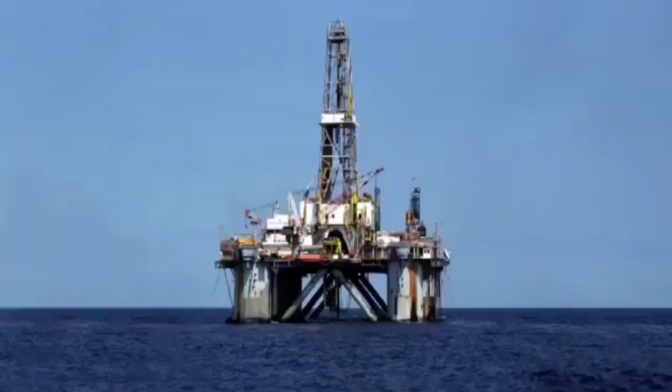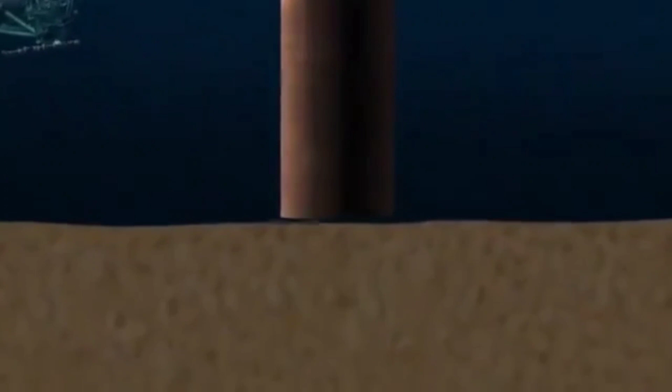Offshore drilling rigs have all the functions of onshore rigs, but also need to stay on station in a variety of sea states and allow for secure connections between the surface and the sea floor. To start an offshore well, a thick-walled, large-diameter hollow tube called a conductor is embedded in the sea floor, with the aid of a bit that jets away the sediment with high-pressure seawater.

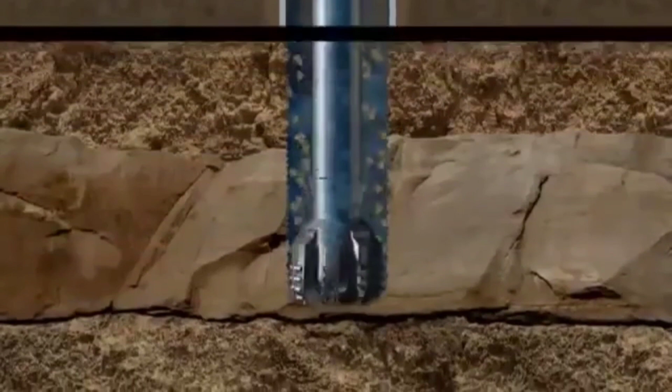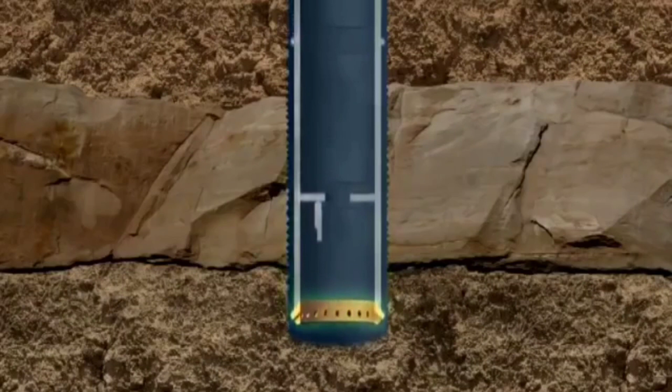When the conductor has penetrated about 250 feet, the jet bit is retrieved and a drill bit introduced. The cuttings are just washed to the top of the well by seawater pumped through the bit. A second run of conductor is now lowered into the hole. At the bottom of the conductor is a guide shoe that stops the conductor snagging on the wellbore. Above the shoe is a flap valve called a float collar.

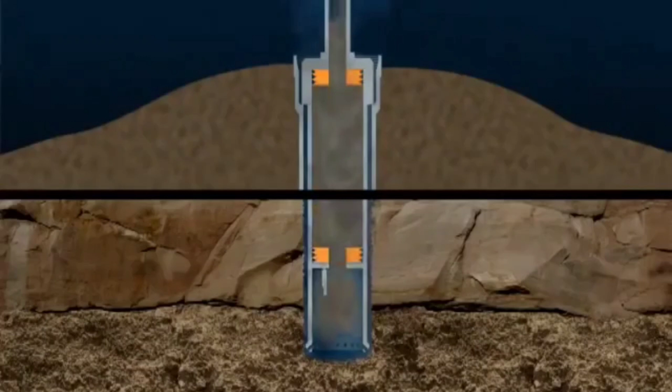A cementing tool is connected to the top of the conductor. A plug that pushes the seawater out is driven downwards by high-pressure cement that fills the conductor. On reaching the float collar, this plug is ruptured, and cement flows out of the bottom of the conductor and up the annular space between the wellbore and the conductor.

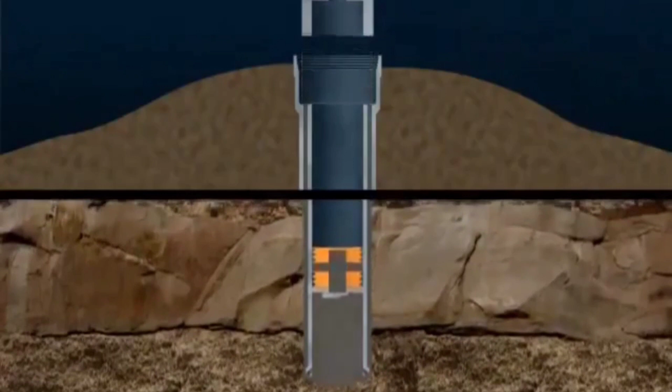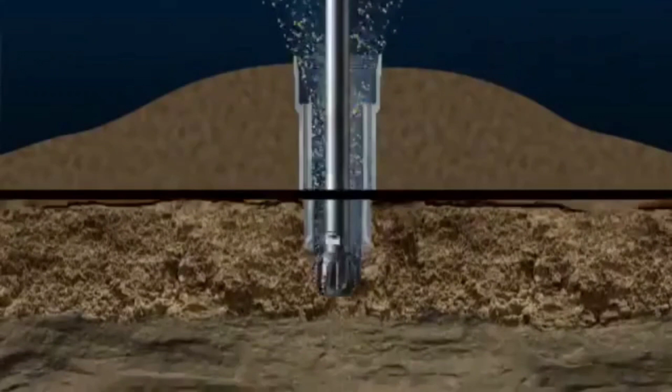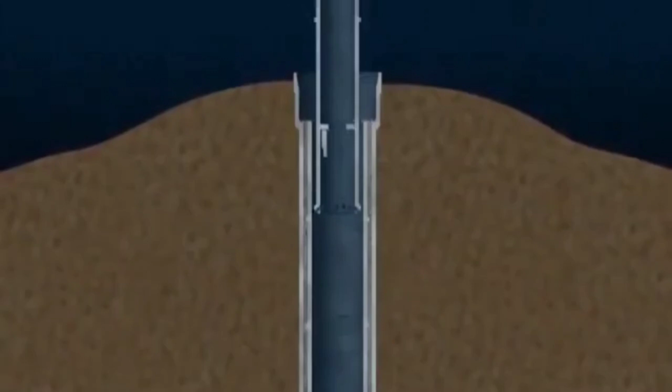The cement plug tool is removed, and when the cement has set, drilling continues with a smaller diameter bit, penetrating the cement plugs and float collar and into fresh rock. After a suitable depth has been drilled, the drill string is removed. Then steel tubing, known as casing, is lowered into the hole and cemented in place. This first casing run has an attached wellhead.

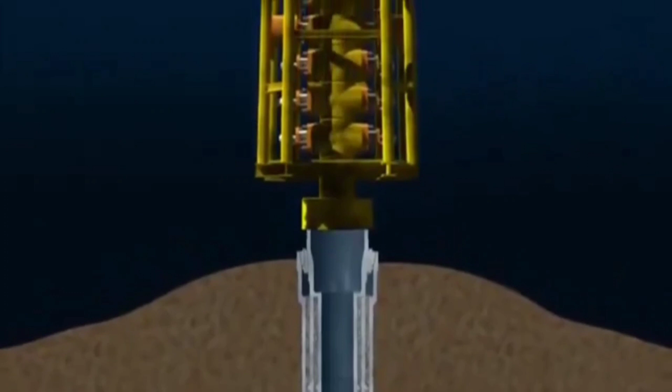A blowout preventer, BOP, a robust set of valves that can shut in the well even if the drill string is down the hole, is then lowered and locked onto the wellhead. The BOP is connected to the sea surface by large diameter tubing known as a riser, which allows drilling fluids to be returned to the surface. From this point onwards, the drilling procedures are similar to those used to drill an onshore well.

With the riser in place, seawater is replaced by a special fluid known as drilling mud that is pumped down the string and exits through ports in the bit. The mud not only cools the bit, but also clears the cuttings from the hole. The cuttings are captured at surface and examined by geologists to characterize the rock types that are being penetrated.

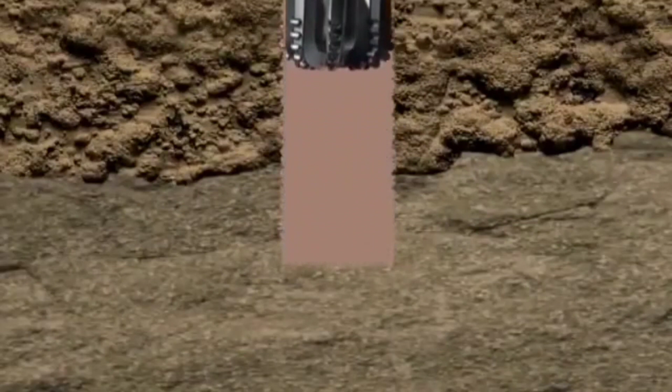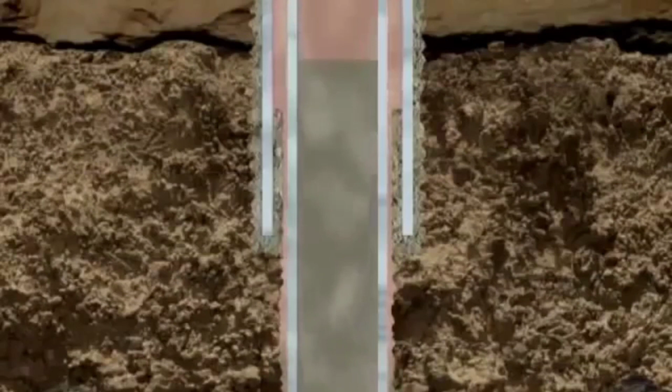As drilling continues, sets of decreasing diameter bits and casing runs are used as the well penetrates deeper into the rock. Each run of casing is cemented in place to provide integrity, a sealed system from top to bottom. The density of the mud is controlled by the mud engineer, adding dense minerals when needed. The aim is to produce a column of dense mud which exerts sufficient pressure in the well to counteract pressure from fluids encountered in the rock.

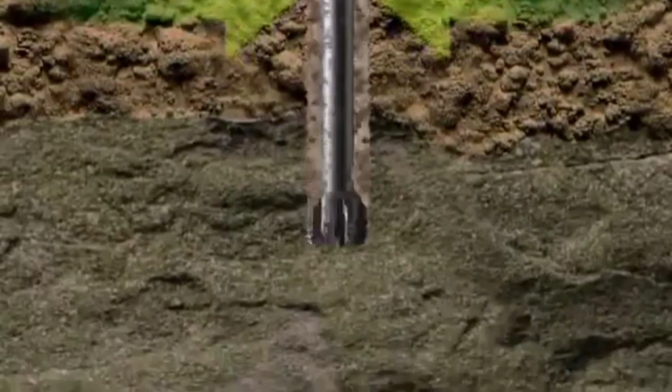This combination of the dense mud column, contained in properly cemented casing, aims to control pressures in the well. The BOP provides a further level of security. When the well penetrates a potential reservoir rock, the oil or gas may be detected by analyzing the drilling cuttings for traces of gas and/or oil. At this stage, it is essential to gather as much information as possible about the reservoir. Two methods provide most of the information.

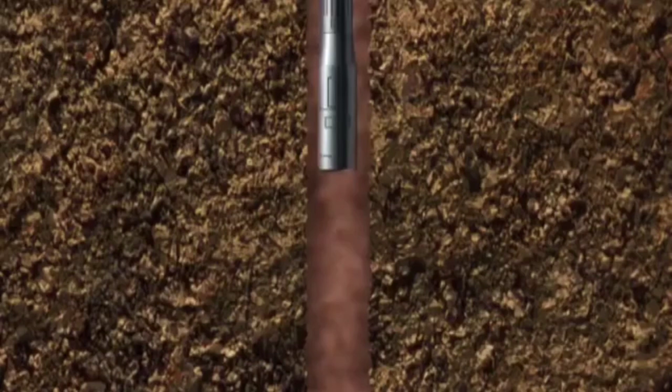In the first, the drill bit is replaced with a diamond-studded coring bit at the bottom of a core barrel. This can cut a complete section of the reservoir rock and return it to surface for detailed analysis. In the second, coring may be replaced or complemented by running a suite of geophysical logging tools, which are run on electric wireline. These are instruments that can measure the physical properties of the rocks as they pass slowly through the wellbore.

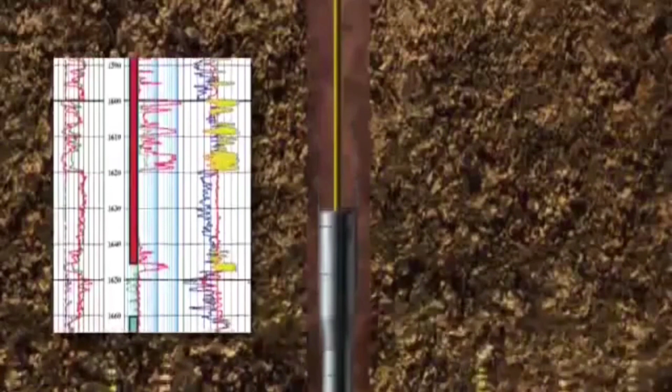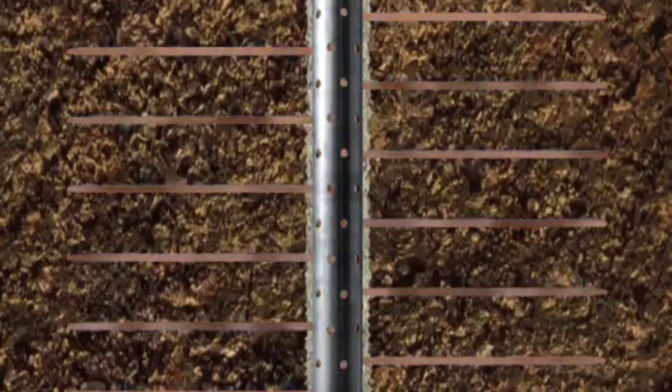When as much information as possible has been gathered from the reservoir, a decision is made on whether to complete the well for production, suspend efforts with the option to return to the well at a later date as more information on the reservoir becomes available, or to plug and abandon the well. If the well is seen to have production potential, the reservoir interval is lined with casing. The casing is then perforated to allow reservoir fluids to enter the well and travel up the installed completion production string to surface.